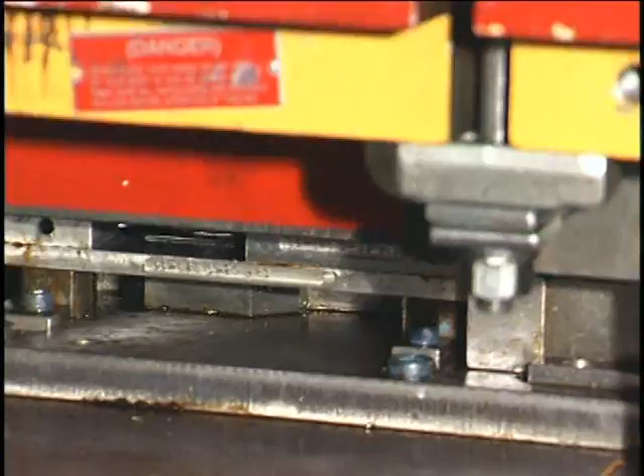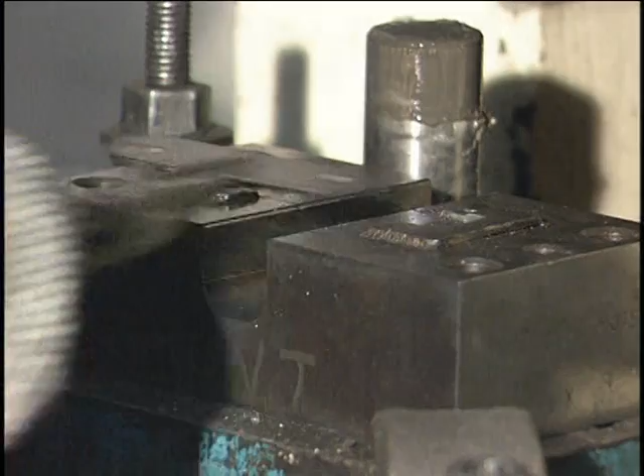The main manufacturing requirement for most sheet metal applications is good formability. This is the sheet metal's ability to deform into intricate shapes without defects in the finished part. In all sheet metal forming operations, one or more types of deformation are involved, including bending, stretching, and/or drawing. Part shape largely determines the relative severity of the sheet metal's formability, especially where drawing and stretching occur.

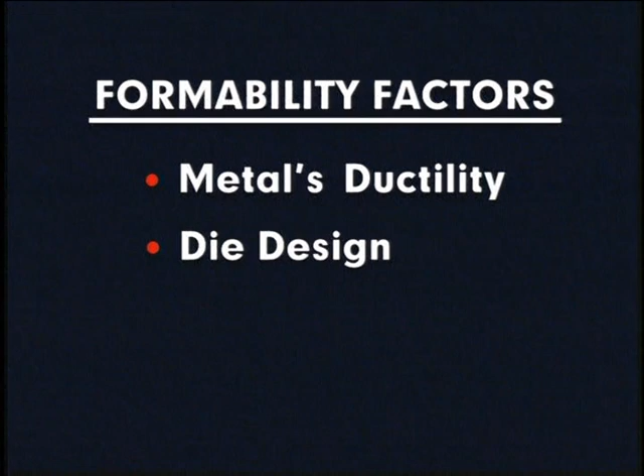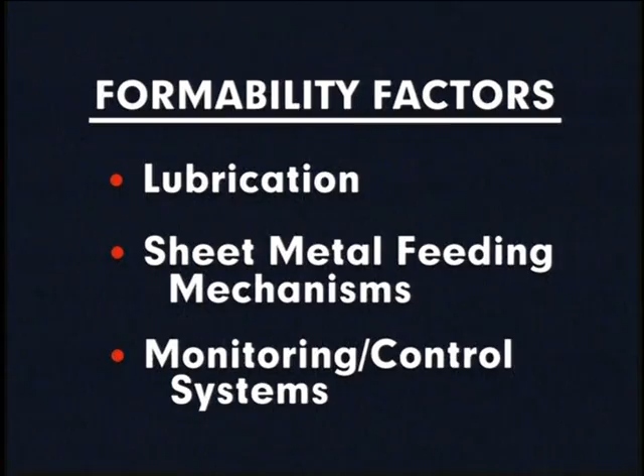But other factors also influence formability. Those include the ductility of the metal, the die design, the stamping press, press speed, lubrication, the sheet metal feeding mechanisms, and monitoring systems and controls which safeguard and synchronize the operation. Because of these various factors, formability differs from one part or operation to the next.

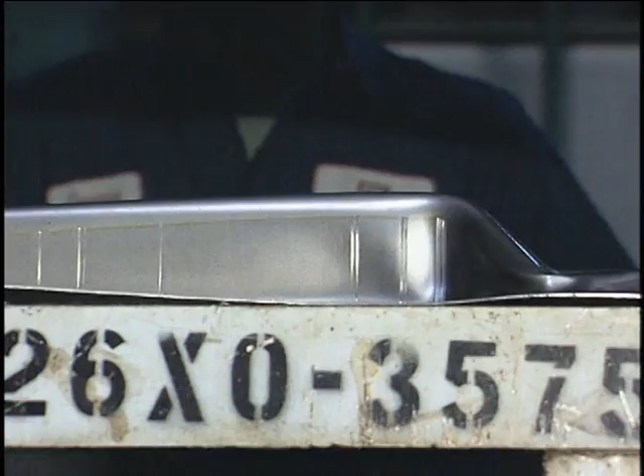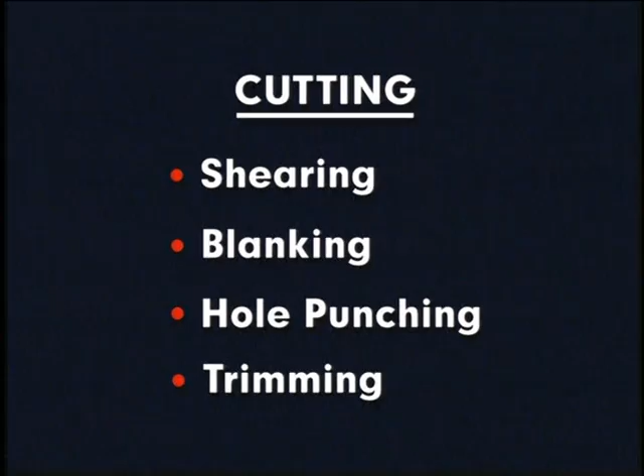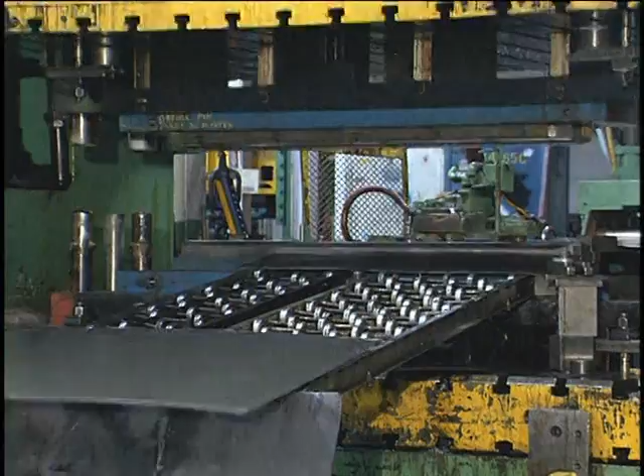Basic die operations include cutting, bending, forming, drawing, and squeezing. The two most common types of dies, however, are cutting dies and forming dies. Cutting, which includes shearing, blanking, hole punching, and trimming, is the most common press-working operation using dies. Shearing is a process by which large sheets of material are cut into smaller sections. These pieces are generally used in later operations.

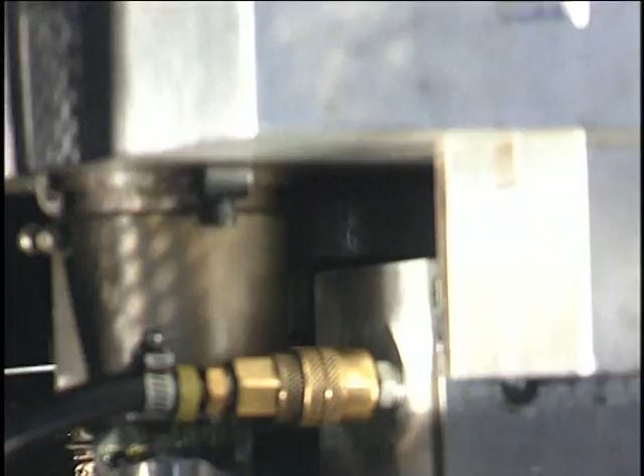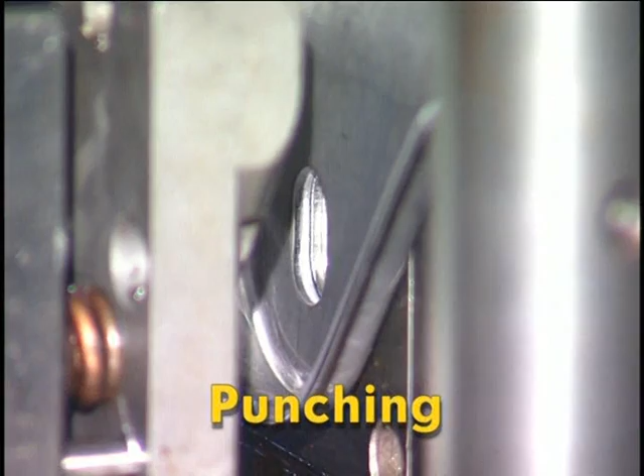Blanking is a form of shearing that cuts sheet metal stock around the complete perimeter of a shape to form a workpiece blank. Reference to a blank in stamping usually implies the need to perform subsequent operations to the workpiece. Punching is the cutting of a slug from the sheet metal stock to produce a hole. Hole punching, as well as other forms of die cutting, requires specific clearance between the punch and the die. Proper clearance is a function of the type, thickness, and temper of the workpiece material.

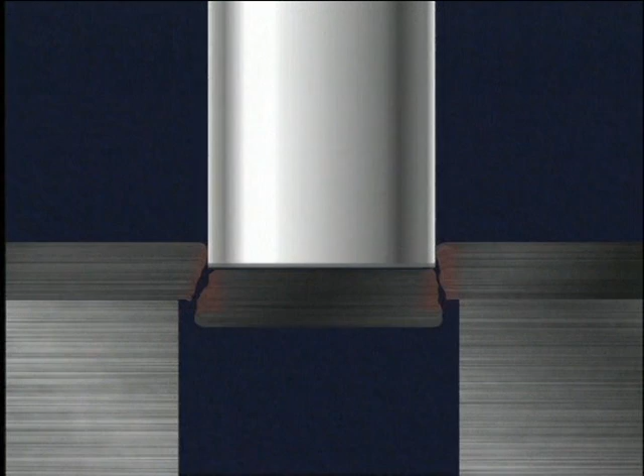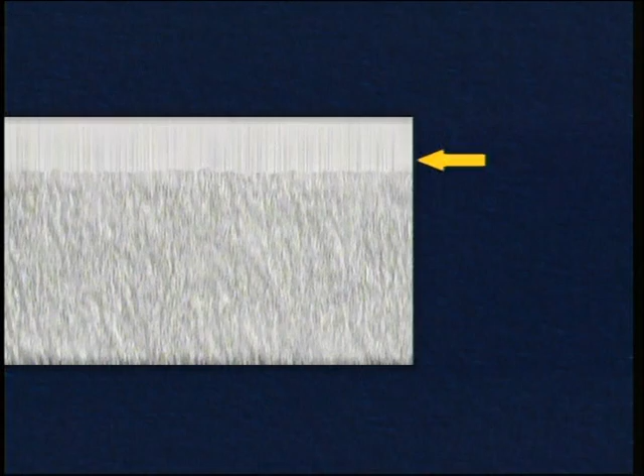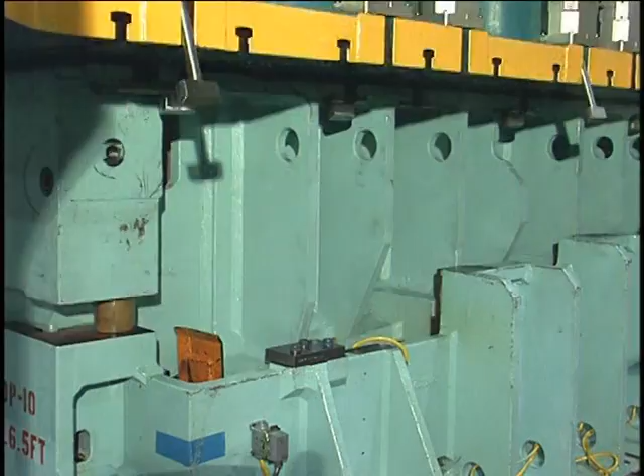During punching, the stock is stressed between the cutting edges of the punch and the die. As the punch penetrates the material, stresses build up until fracture occurs. Close inspection of a die-cut edge of sheet metal stock reveals a burnished edge where the punch penetrated the stock, followed by a rough edge where fracture occurred. Mild steel generally separates when approximately 1/3 of the stock thickness has been penetrated. However, when harder materials are die-cut, penetration by the punch may be less than 1/3 the material thickness, and softer materials may require almost full punch penetration before fracture occurs. After a part has been formed, a trimming die is utilized to remove the excess scrap metal from the workpiece.

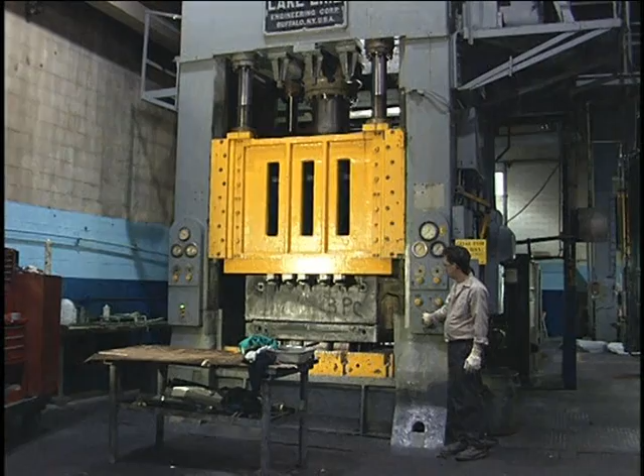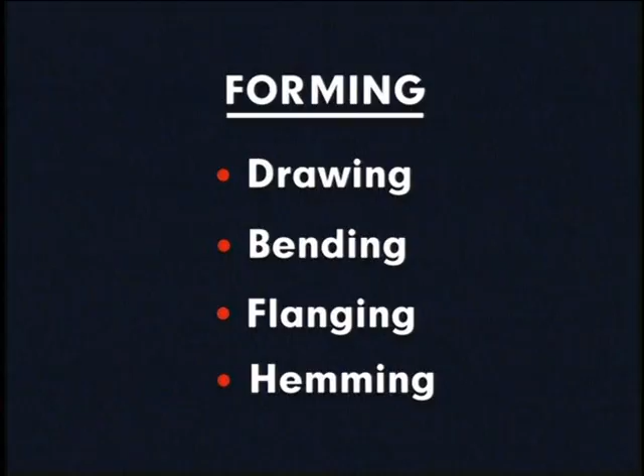Forming is a broad term for metalworking processes in which the shape of a punch and die is reproduced directly in the metal. Some common forming operations done with press-mounted dies include drawing, bending, flanging, and hemming. Drawing shapes a flat pre-cut metal blank by forcing it into a die cavity with a punch without excessive wrinkling, thinning, or fracturing of the metal. Various complex forms may be produced by drawing.

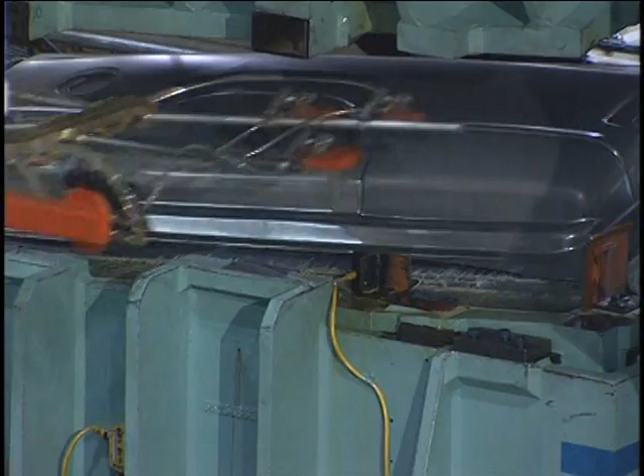Drawn parts may vary in size from small parts up to aircraft and automotive parts large enough to require mechanical handling equipment. For properly draw-formed parts, the force exerted by the punch must be great enough to draw the metal over the edge of the die opening and into the die. Additionally, the drawn metal must have a combination of strength and ductility to avoid rupture in the critical area where the metal conforms from the punch face to the punch sides.

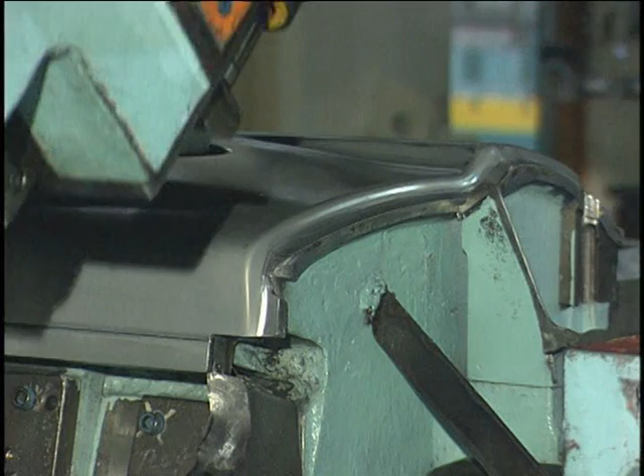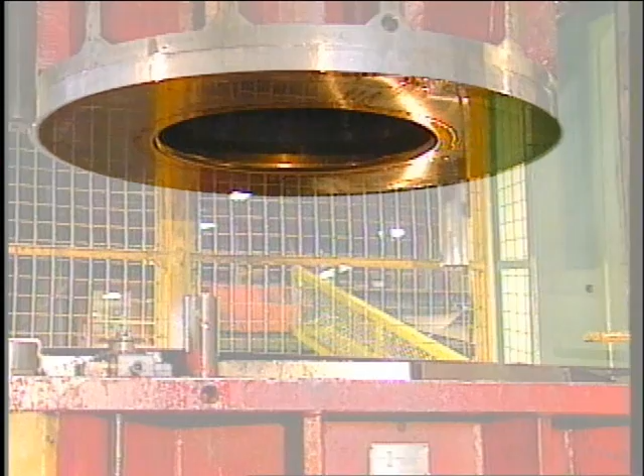Compressive forces on the metal in the area beyond the die's edge will cause the metal to buckle. If this metal were pulled into the die, buckling would increase until the metal ruptured. To prevent buckling, the blank must be held tightly by a blank holder. On most forming presses, the blank holder is an outer ring through which the inner ram or punch passes. The blank holder holds the workpiece against the draw die to control metal flow as the punch forms the shape.

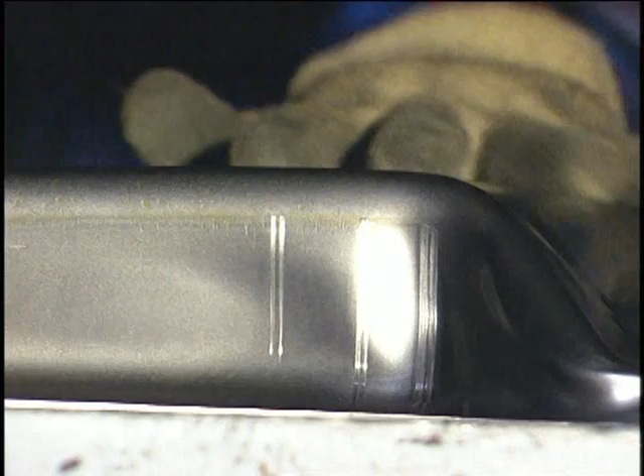In practice, the blank holder must exert less pressure against the blank than the punch, so metal can flow into the die, yet it must exert enough pressure to prevent wrinkling. Factors determining necessary blank holder pressure vary from part to part, but include the severity of the draw reduction, metal properties and thickness, die lubrication, and other factors.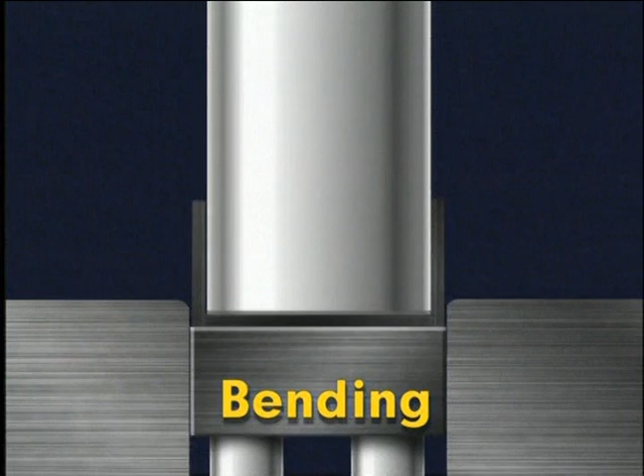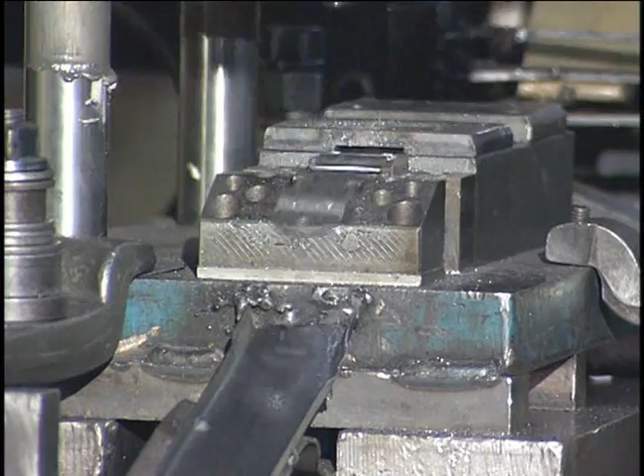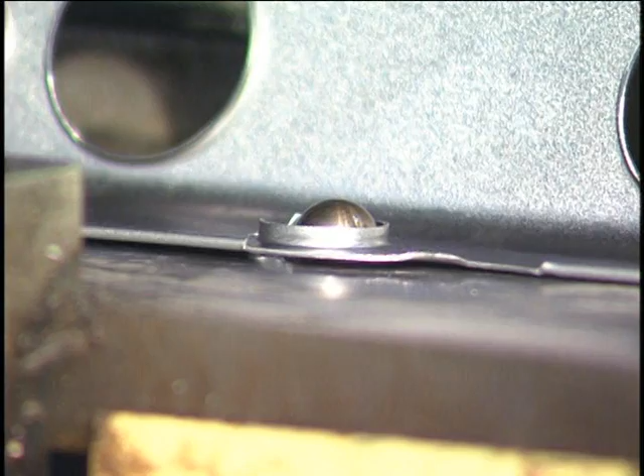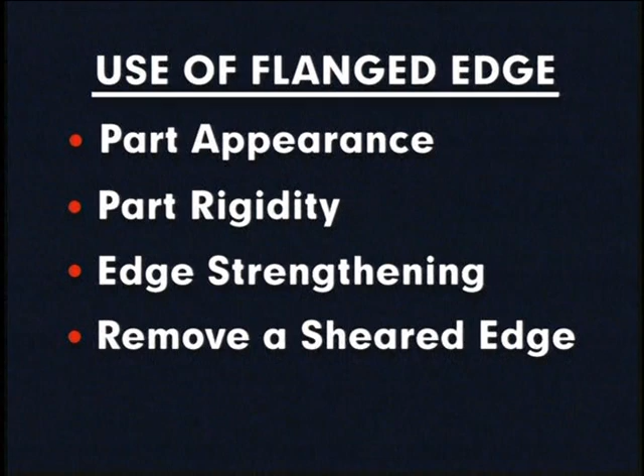Bending is performed on sheet metal to gain rigidity and to produce a part of desired shape. Bending is usually done to make structural stampings, such as brackets, braces, and supports. Flanging is a forming operation similar to bending, except that the flanged edge is shorter and narrower compared to the overall part size. A flange can be bent down along a straight or curved line and is used for appearance, rigidity, edge strengthening, removing a sheared edge, and to provide an accurately positioned fastening surface.

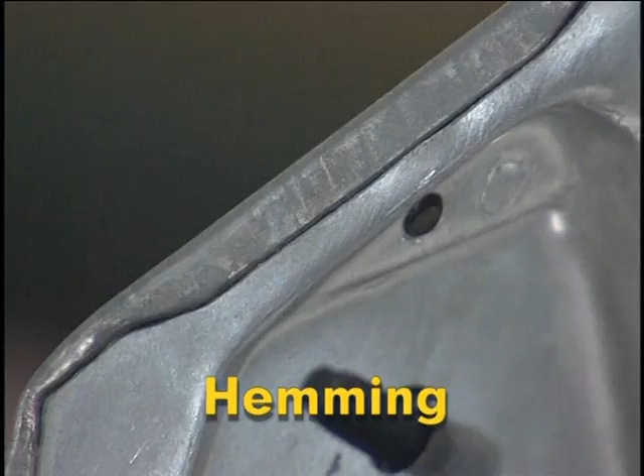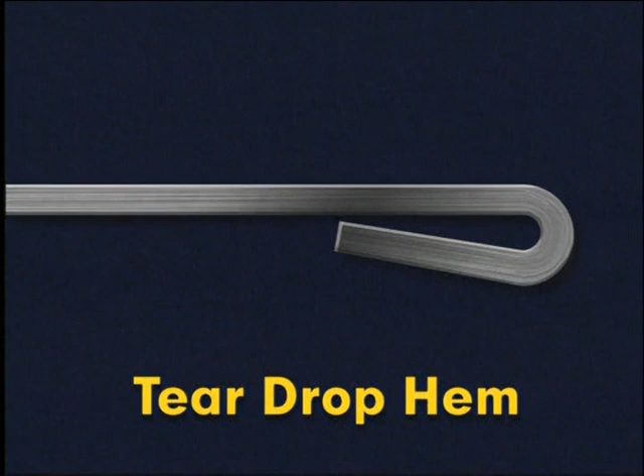In sheet metal forming, hemming is utilized primarily to provide a smooth, rounded finished edge and to attach sheet metal parts together. There are 4 basic types of hems. Those include the flat hem, which can be used with materials having high ductility, the teardrop hem, which is used on materials lacking the ductility required to form the flattened hem without cracking, the open hem, and the rope hem, which are used to join sheet metal parts together.